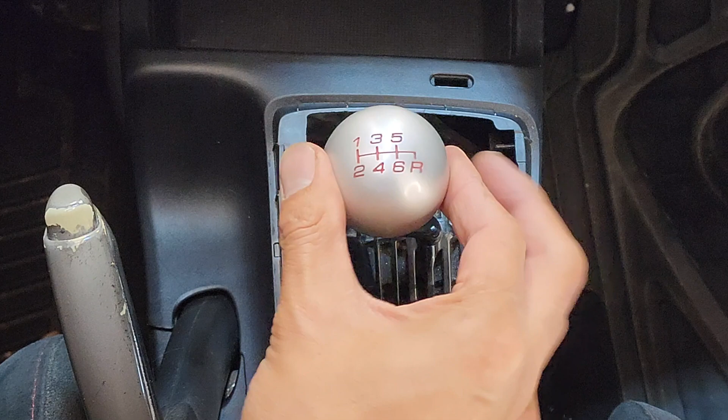This is the OEM shifter in my Honda Civic Si. This is my Hybrid Racing shifter. It has a little less play. And this is the Acuity shifter. This thing is super stiff.

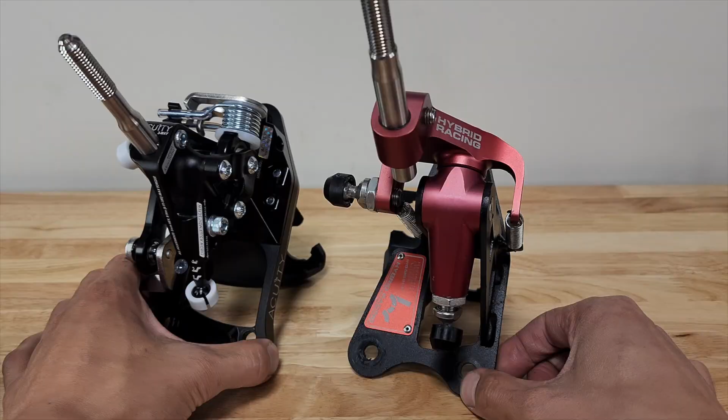Now these are two completely different designs. You can see the Hybrid Racing has two very thin springs, whereas the Acuity has a really big, thick spring. To make your adjustments on this shifter, you're gonna need a 17mm and a 12mm wrench. You'll have to break loose this locking ring first, and then you use the 12mm to make your adjustments this way.

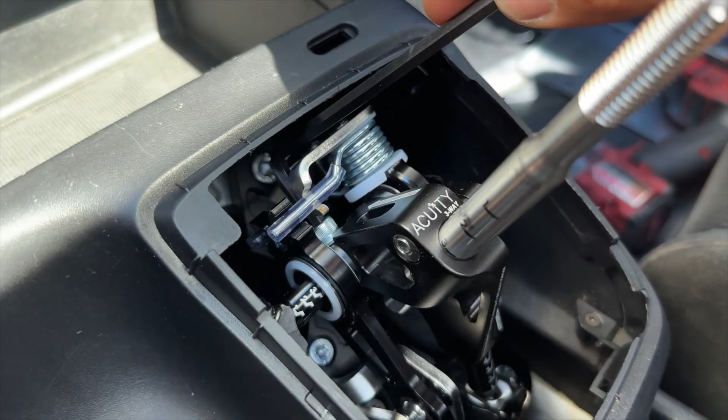On the other hand, the Acuity shifter is very simple to make your adjustments. All you need is one tool, which is a 5mm Allen wrench. Bam! And it slides in and out just like that. No twisting. It's easy to access even if it's installed on the car.

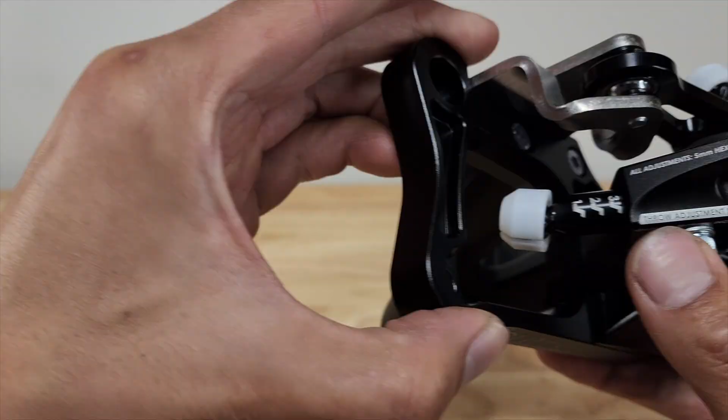The Hybrid Racing doesn't have any markings or indicators on your adjustment, so you just pretty much eyeball it. The Acuity shifter actually has markings all over this thing. Everything is labeled, so this tells you it's your throw adjustment. This is your gate adjustment right here. And overall, the shifter looks really well put together.

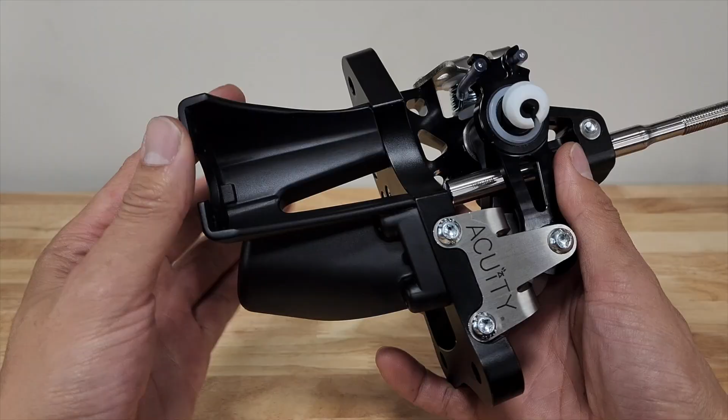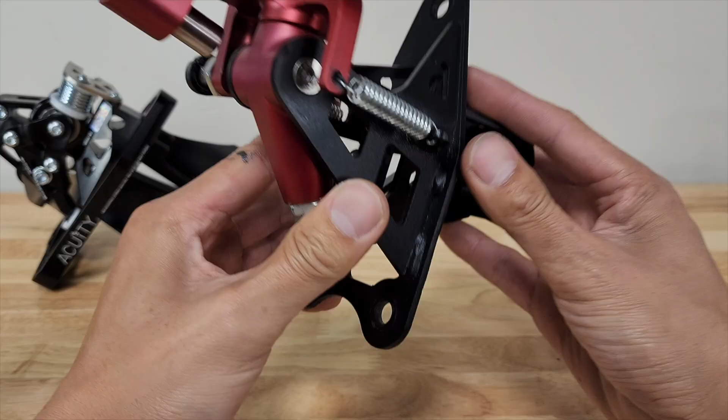There's no welds. I assume this is CNC machined, so you get a precise and consistent finish on all of their shifters. Whereas on the Hybrid Racing, on the bottom bracket, there's a lot of welds everywhere. Some are fat, some are thin. There's some splatter going on. It's not terrible, it just doesn't look as nice. So as far as build quality goes, I would say Acuity takes the cake on this.

And one thing I want to note about the Hybrid Racing shifter is when you want to adjust your shift knob height, you don't need a 17 or 12mm wrench. Instead, you'll use a 5mm Allen key. And it's really hard to make this adjustment. This is really tight and it makes a loud popping noise. This comes loose, but if you wanted to raise it up, you would have to kind of hold it in place and tighten it like this. Ugh. And there you go. That's how you adjust the shifter on the Hybrid Racing.

The Acuity uses a 5mm Allen wrench on all three adjustments, so you don't need different tools to make different adjustments. All you do is break it loose, like so, and it's easy to adjust, just like that. No loud pops, no wrestling. Boom.

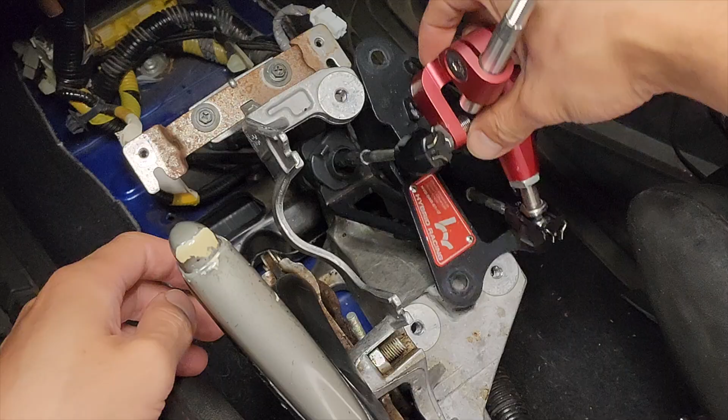Next, the install. You might not think there's a big difference on the install, but on my Honda Civic Si, I have OEM cables, and the Hybrid Racing actually sat pretty flush with the mounting points, and so it was easier to install. But with the Acuity shifter, even with this thick base, there was still almost a 2-finger gap between the bracket and the mounting points. And so you would have to strategically line up the holes and bolt it down. But as far as installation goes, it'll have to go to the Hybrid Racing.

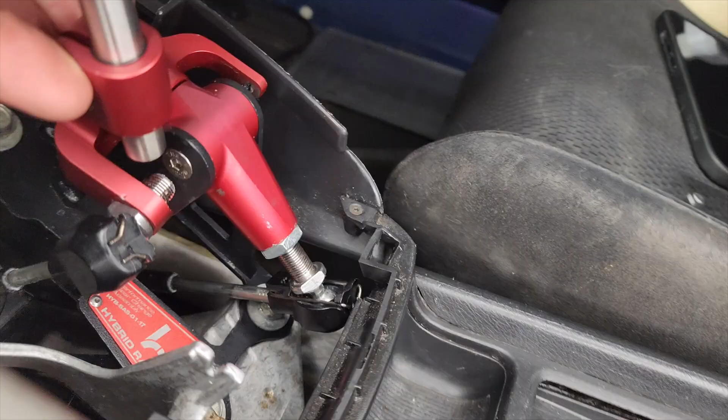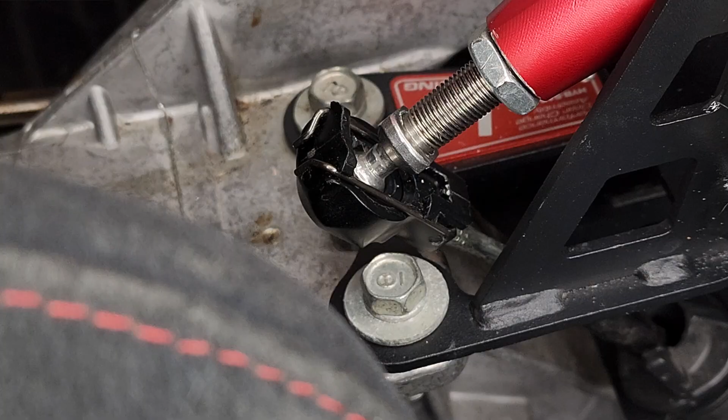Oh, and I forgot to note, if you want to extend the throw on the Hybrid Racing, when you extend this all the way out, it shortens your throw, and that's what a lot of people want, right? Well, on the Hybrid Racing shifter, you would have to cut a piece of your center console if you want this to be at the max setting. And on top of that, if this is too far extended, it's gonna hit the mounting bolt right here. So you have to get it just right so it'll clear that bolt, and you have to cut a piece of your center console. But on the Acuity, you can have this all the way extended and it's not gonna hit nothing, and you're good.

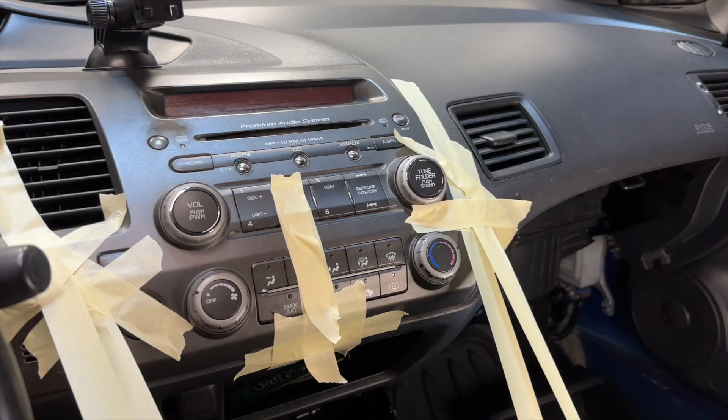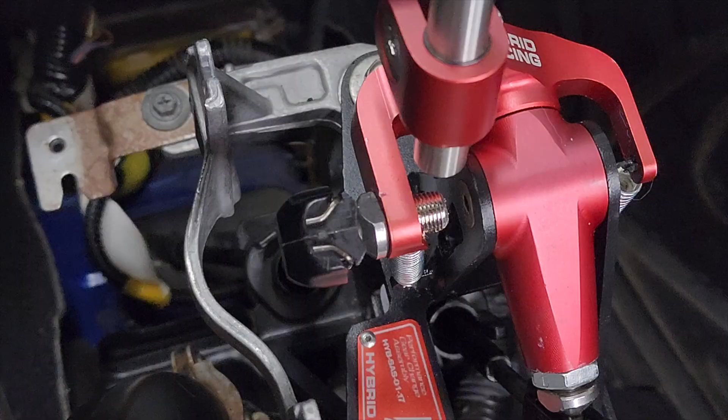All right, time for an actual test. In this test, I'm gonna be comparing the gate and the throw of each shifter. Left and right for gate, up and down for throw. I'm gonna measure the gate spacing on the lowest setting and the highest setting, and the same for the throw adjustment.

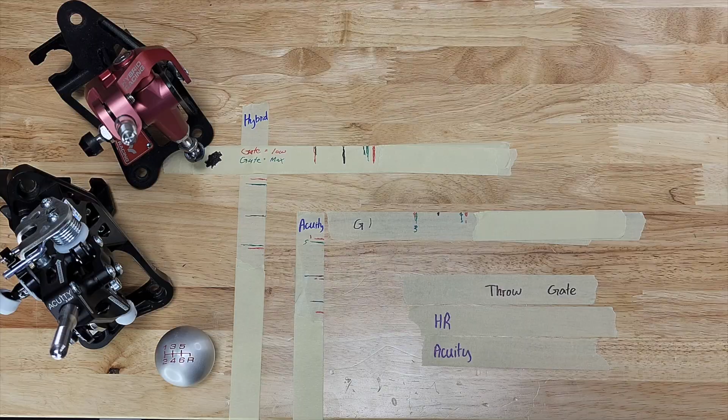Also gonna be at the lowest and highest setting for each shifter. Now, why would you want to adjust your throw and your gate? With your gate and throw adjustment too narrow, it increases the chances of you misshifting. Because yes, you can shift a lot quicker, but there's also a higher risk of you going into the wrong gear. Especially if someone else new drives your car and they're not used to your shifter feeling, there's a good chance they might mess up your transmission. Hopefully not.

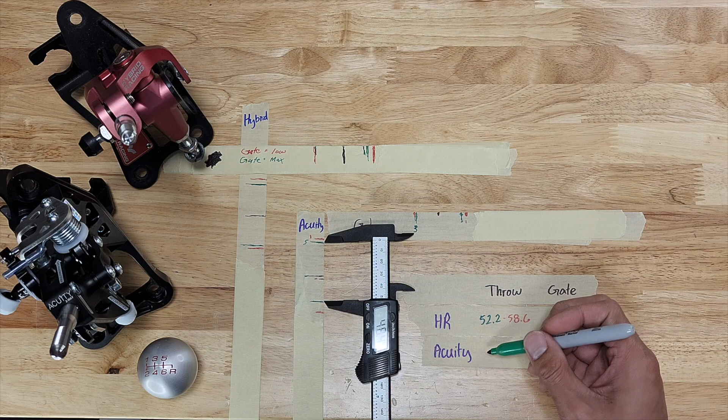All right, I have all of my measurements laid out on the table. The outside measurement is going to be Hybrid Racing. The inside measurement is going to be Acuity. I'm going to start off with measuring the throw. The throw is just the distance your shifter is going to travel all the way up and down. So in green, this is going to be our shortest distance for the throw. And in red, this is going to be our longest distance for the throw. And it looks like we're at about 52.2 millimeters for Hybrid Racing and 58.6 for the longest throw. Acuity is at 48.4 and then 60 millimeters for the max setting.

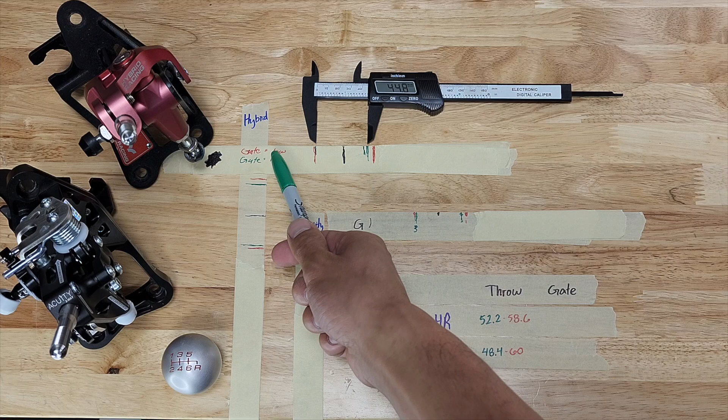Next, we'll compare the gate adjustment. Gate is when you move your shifter left and right while it's in neutral. Hybrid Racing is at 44.8 and maxes out at about 51 millimeters. Acuity is at 38.3 and about 42.9. Even at the widest setting, it's still shorter than the Hybrid Racing at its lowest setting.

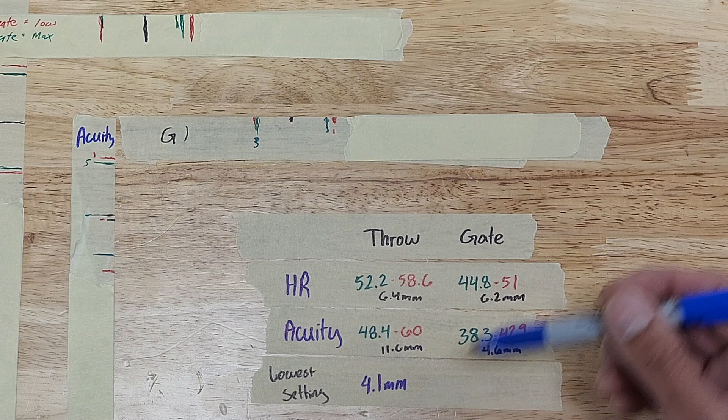So based on these numbers, you can see that the Acuity has a lot more room for adjustment on the throw versus the Hybrid Racing. And the gate adjustment on the Acuity is much shorter than the Hybrid Racing. So with the Hybrid Racing and Acuity both set at the lowest setting, the Acuity is 4.1 millimeters shorter. And with the gate adjustment, the Acuity is 6.5 millimeters more narrow than the Hybrid Racing. So based on my results, it appears that the Acuity has the lowest throw and the lowest gate.

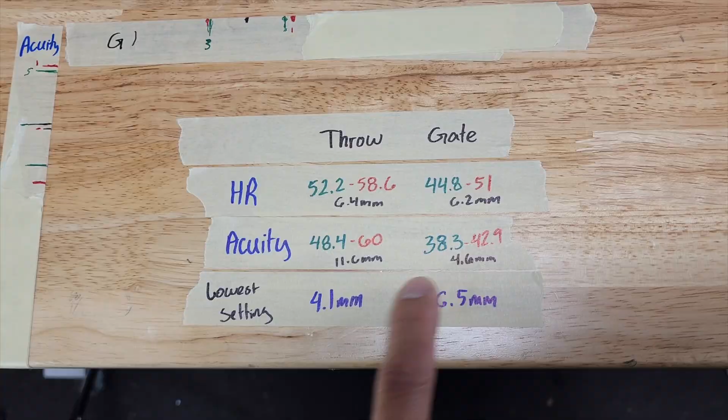All right, and now my final thoughts on the shifters. So when I initially installed this Acuity shifter, I played around with the adjustments, and to be honest, they both feel pretty much the same. I mean, the difference is so minimal. The Acuity is only 4 millimeters shorter on the throw and 6.5 millimeters more narrow on the left and right movement. The difference is so minimal that, in my personal opinion, I don't think it really matters.

But the one thing that I really noticed was when I would put the shifter in gear, I noticed that the Hybrid Racing had more play while you're in gear. So there's a lot of left and right movement, whereas on the Acuity, it's very stiff. The left and right movement is very minimal. You would have to apply extra force to get that same movement or play like the Hybrid Racing. So the Acuity shifter definitely feels stiffer or more rigid.

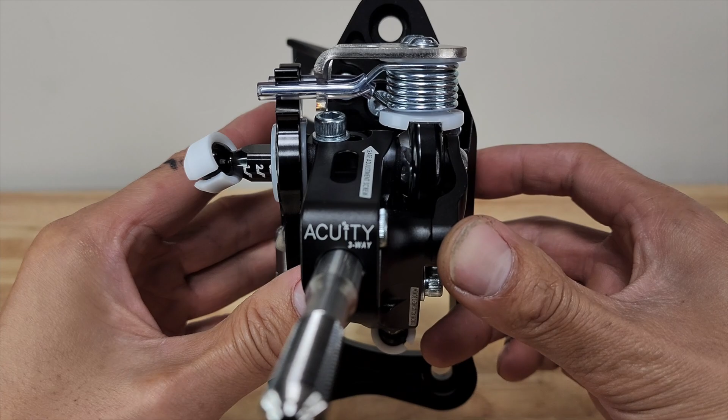When I first got the Hybrid Racing shifter, I didn't really care about the random weld spots and the messiness going on down here. But now that I got the Acuity and looking at it side by side, the Acuity has a much better finish. It looks a lot cleaner and it just feels more heavy duty. I really like the markings on the Acuity shifter. They even tell you the torque specs on all of the screws.

So overall, the Hybrid Racing shifter, it's nice. I really like the color, but the Acuity is just an upgraded version of the Hybrid Racing shifter. Because yo, if you didn't know, the lead engineer at Hybrid Racing actually left and went to Acuity. So Acuity is pretty much the upgraded version of Hybrid Racing, technically. Just saying.

But that's pretty much it, guys. At the end of the day, these are both short shifters. They do the same thing. The differences are very minimal. But if you have the Hybrid Racing and you're thinking about upgrading, I would say it's definitely a good upgrade.